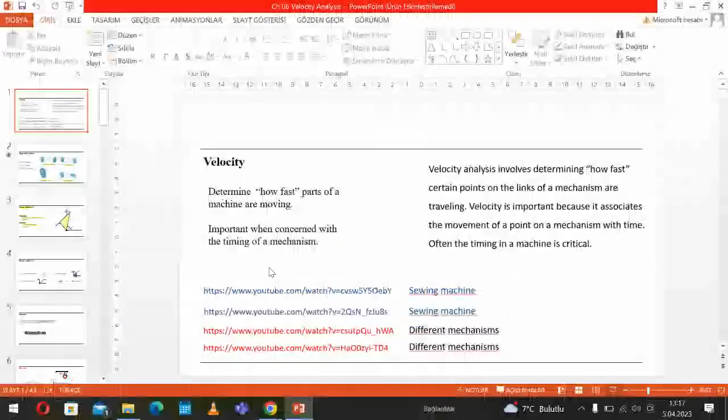So I send the email to you. Let's see that. I need the homework in a certain content, and therefore let's see that. So then I will share with you now. Okay. Not that. Okay, here.

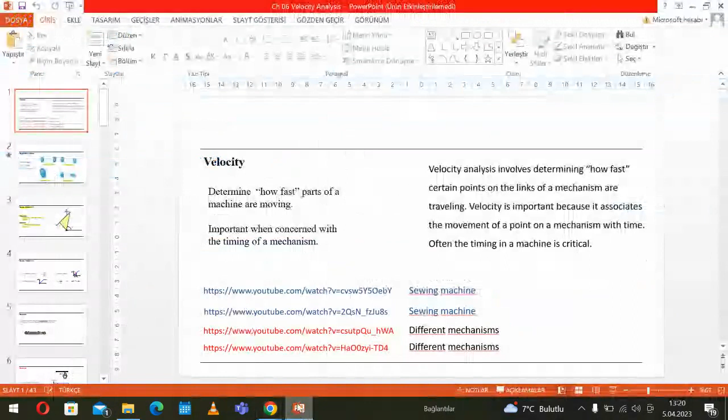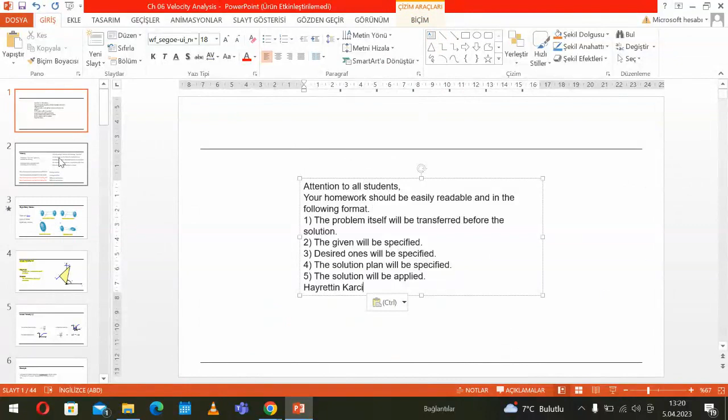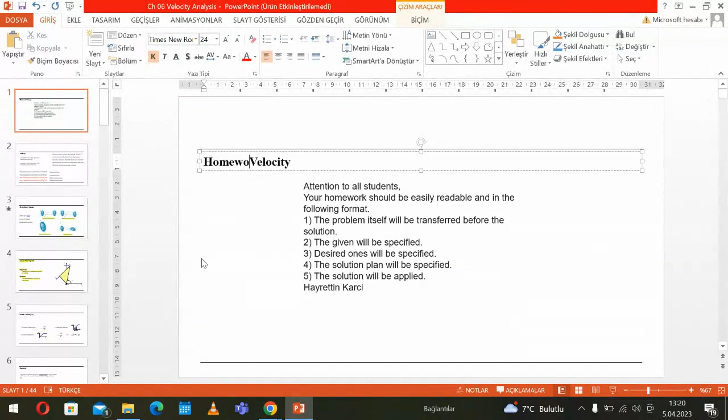So this is the content, okay. So you see the content of the homework, or the rules for the homework. I sent this already to you via email. First of all, the problem itself will be transferred before the solution. I have to see first the question, problem as problem, then what is given, and what is desired or to find, and the steps of solution, plan for the solution, and the solution step by step. It must be followable and understandable. So not write just a piece of paper, something, and send as homework. It must be, let's say, a good format. I expect a good format.

Okay teacher, thank you. Okay. Deadline will be 10th, or the 10th. Okay, no problem. 10th April.

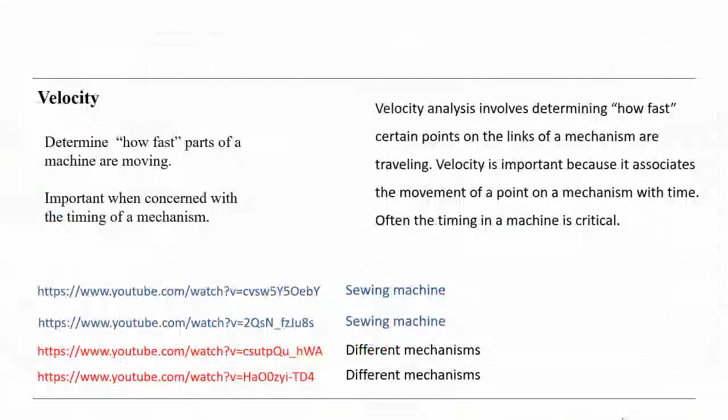So we said the velocity... I just have a note for the homework. Yes, this is the note for the homework.

The homework itself gonna be handwritten? Yes, it can be handwritten, but it must be readable, understandable, followable. If you cannot understand, I cannot follow it. So therefore I write these steps you have to follow.

First of all, the problem. What is the problem? So you display the problem, and then what is given and what is expected, or what is to find, and then you make the plan, the solution. First I will do that, and second and third and so on, and you solve the problem. So this is the methodology to solve a problem, and I am really interested to force you to work with this methodology. It is very important for you, not for me. For me, it must be understandable, because I cannot spend lots of time to see what it is and what it means. It must still have a format. Okay, so thank you.

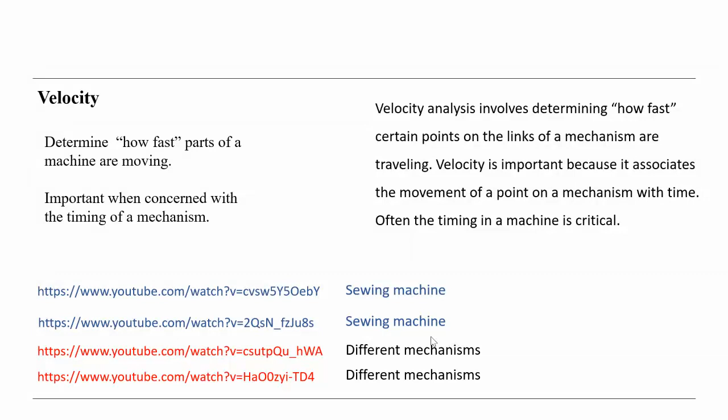So we are now studying rigid body motion. Since a link of a mechanism is a rigid body, we are dealing with rigid bodies in mechanisms. What is the motion of a rigid body? We said the motion can be divided into parts: rectilinear motion or curvilinear motion, pure rotation, or general plane motion, and so on.

Here we started with a simple example, linear velocity - that means linear motion, linear velocity. Let's use the laser pointer here. We have a joint, and it is turning around this joint. The point A has the velocity VA as a vector, and the point B has the velocity VB. We know also from dynamics that we learned already, if we have such a link or part of a mechanism turning around a point.

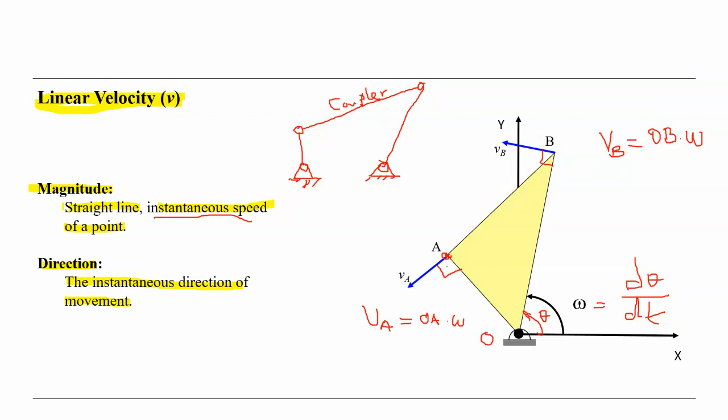But we will see later, in the case of a coupler like this here - this is the crank we said, this is the rocker, and this is the coupler. This coupler undergoes plane motion, and since it undergoes plane motion, all the kinematic parameters are instantaneous - I mean, for a certain time, for an instant.

This is straight line instantaneous speed of a point, for example, on the coupler. So the direction in this example is already known - the instantaneous direction of the motion is like this. The linear motion direction must be perpendicular to OB for point B, and for point A, the direction of the linear speed must be perpendicular to the line OA.

Okay, so then linear velocity, how can we define the linear velocity? We can define it as V equals dr over dt. What is dr? That's the displacement. And dt is the time passed for this displacement.

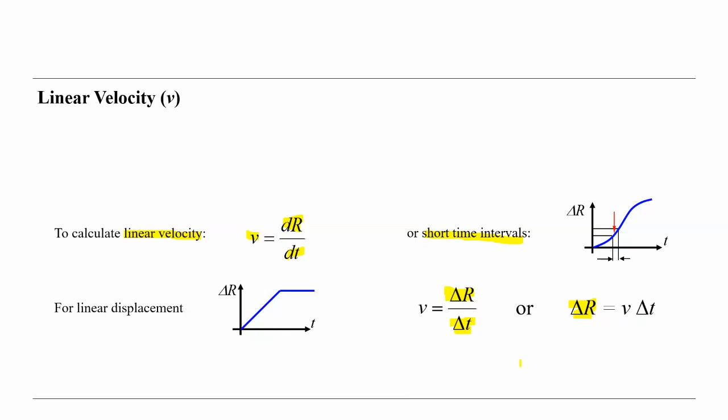This is how we calculate linear speed, linear velocity. We already learned this in dynamics. So here also we can write, in a short interval, v equals differential displacement over dt, or dr equals v dt, and so on. You remember these equations from kinematics. And we said, there's an example here.

So a hydraulic cylinder extends at a constant rate, meaning the linear speed is constant. Since it is a linear actuator, it provides the linear motion, and its full stroke is given as 256 millimeters, and the time for that is 4 seconds. Determine the velocity of the rod end, as we already did in our last lessons.

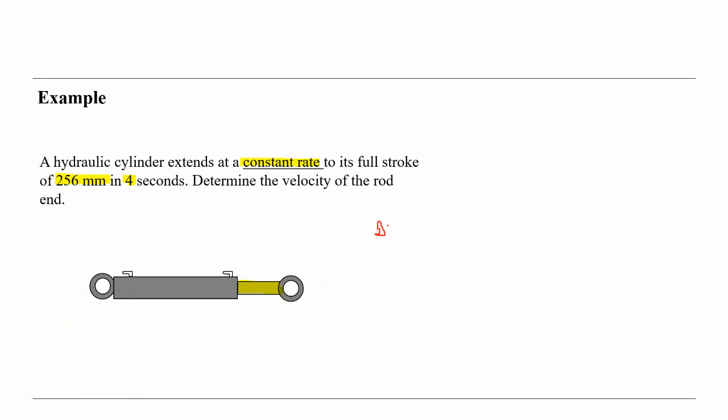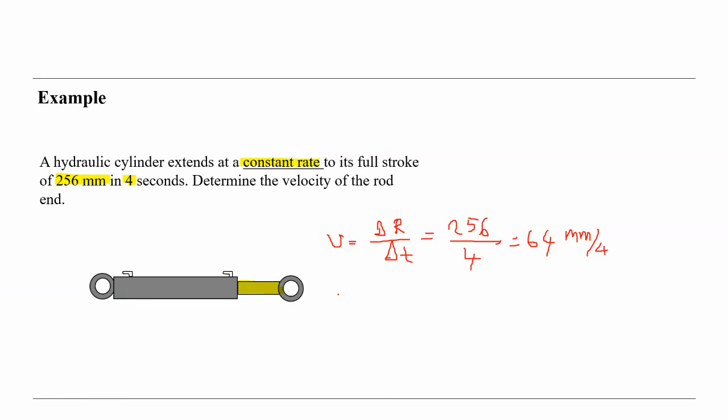So this is dr or ds over dt. This is the velocity, magnitude-wise, and this equals 256 over 4, which gives 64 millimeters per second. Is it correct? Okay, it's correct. So, let's continue.

Also here's an example. The velocity profile is shown here. You see it starts from 0, this is the origin, and goes in that direction. This is the velocity-time graph, and it continues like this, then stops. That means we accelerate, starting here, and continue with a constant speed. This is the constant speed area.

Let's choose that here. So this is the part from 0 to 0.5 second. So we accelerate, we apply the acceleration, meaning we increase the speed from 0 to 9, and we continue with the speed 9.

And then we continue, let's say 3.5 seconds, and after 4 seconds in total, we reduce the speed and bring, let's say, the gripper here, we stop the motion. So the velocity profile is shown for a programmed robot here, this is the robot, and here the gripper, and we need to determine the total displacement of the gripper.

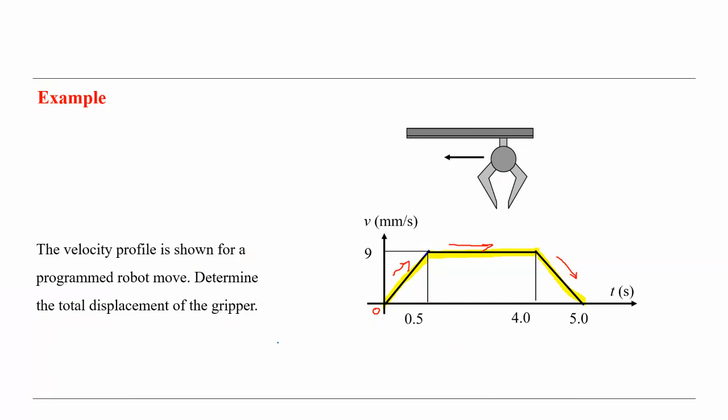So how can we determine the displacement of the gripper? What is displacement? We already know that to define the speed, we said speed equals dr, let's say the displacement s, over dt. So this is the displacement.

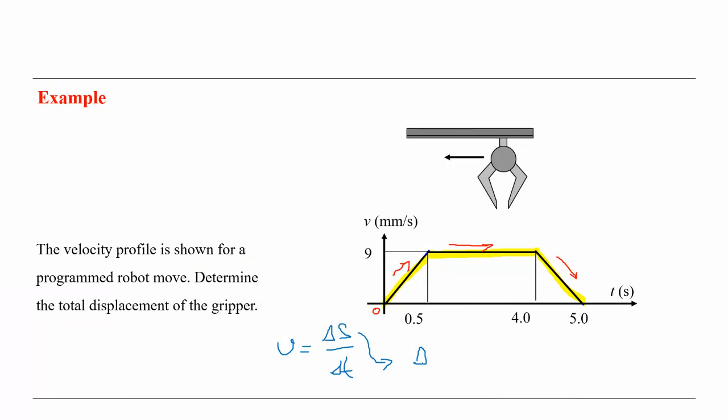So what is ds? If we write it, ds equals v times dt. So v times dt is actually, if we consider here, the area, v times dt. We will take the integration, right? Yes, integration, but in this case we have a defined geometric figure, and we don't need integration. We can calculate the area of these geometric figures.

Let's say this is S1, and this is S2, and this is S3. So the area of S1 equals 0.5 times 9 over 2. This is the area of this triangle. And S2 equals, here 9 times, this is the time 4 minus 0.5, so 3.5.

This is the time, and the speed is constant, so times 9. S3 again is a triangle here, this is the area here. And here, this area here is S3, and so on.

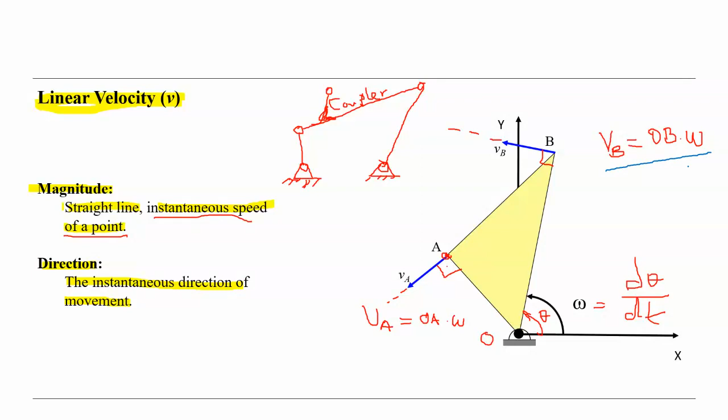Also, the relation we already taught between angular speed and linear speed we discussed, and we can write here VB, the linear speed of point B, is equal to omega 2 times the distance OB, length times omega 2, and this must be perpendicular to OB.

This is very important, and this is also perpendicular to OA, because it's the linear speed of point A. Here again, VA is equal to the distance from O to A, OA, times omega 2. Omega 2 is the angular velocity.

Okay, so we learn what is the relation between angular velocity and the linear velocity of a certain point which is turning about a point, and we know also the angular velocity.

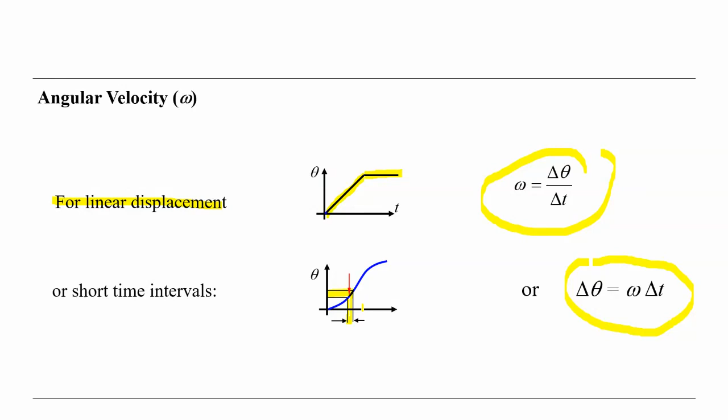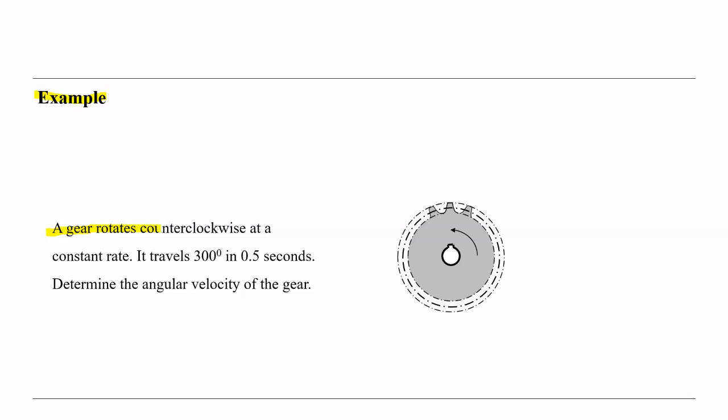So let's have an example regarding that. Here's our example: there's a gear, and the gear rotates counterclockwise, in that direction, at a constant rate. Constant rate means per time per angle is constant, so we can write it in that way.

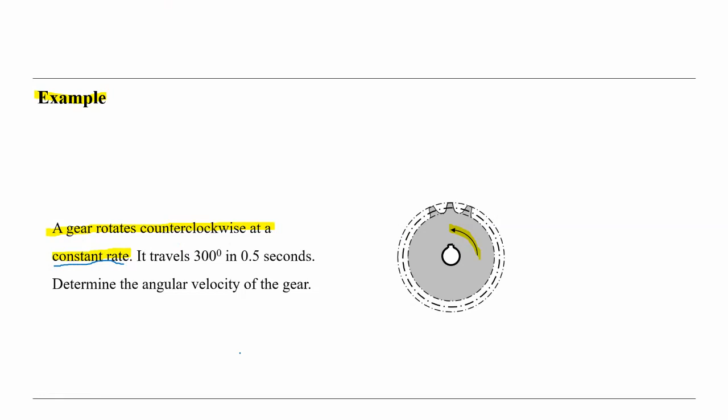So the counterclockwise constant rate means omega is constant. That means for a certain change of theta, we always have the same time delta t. So maybe in 1 second, 1 degree, or in 1 second, 1 radian, and so on. So this is constant, okay.

So it travels 300 degrees angle in 0.5 seconds. Determine the angular velocity of the gear. The gear travels 300 degrees in 0.5 seconds, so we have to calculate the angular velocity.

We know the angle, so let's say given is the angle, theta in total is equal to 300 degrees, and the time for that is t is equal to 0.5 seconds. That means we know the gear in total is turning about the point O here.

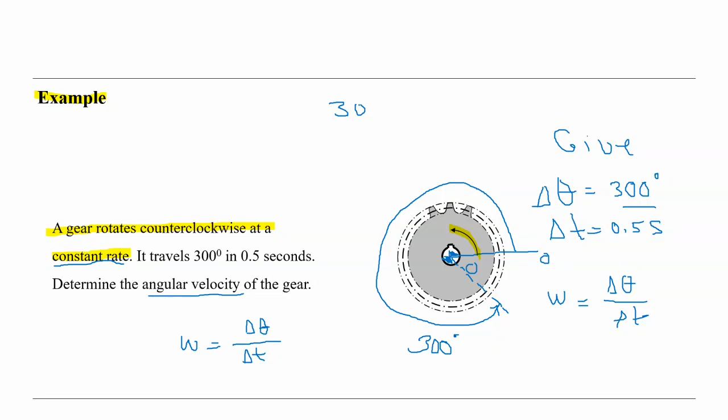So we know that 300 must be divided by 180 and times pi, because 180 degrees is 1 pi, and 360 is 2 pi. So then here we can calculate them.

The angle passed in radians. So we can say this is 0, here we have 3, and here so let's say 5 over 3 pi. Okay, so this is the angle passed, and this is time. So then we can say, okay, here's the angular speed.

Let's use the red one, it's better. So the angular speed is equal to 5/3 pi over 0.5 second. And this is radian per second, or 1/second. So this is the angular speed.

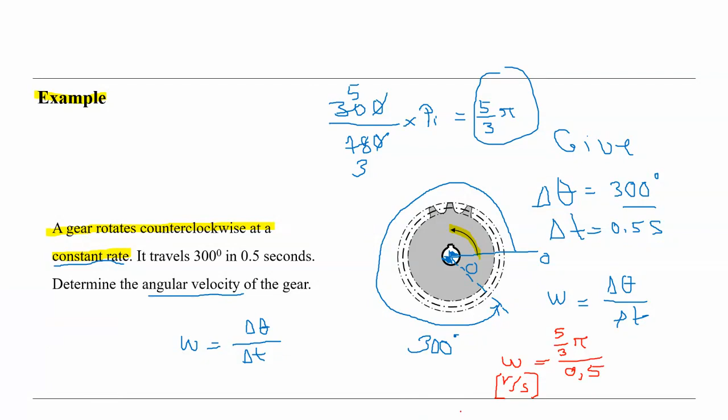The directions of V and omega are always consistent, meaning the direction. The omega can be clockwise or counterclockwise, and based on that, if the omega is counterclockwise, the linear speed is also counterclockwise, in the left hand. So then to calculate the magnitude, we need the length of the position vector times the omega. According to these equations, V is equal to the magnitude of the position vector times the omega, or in vector form.

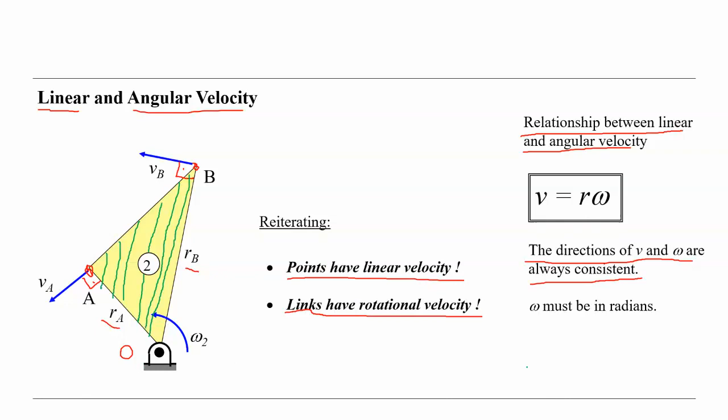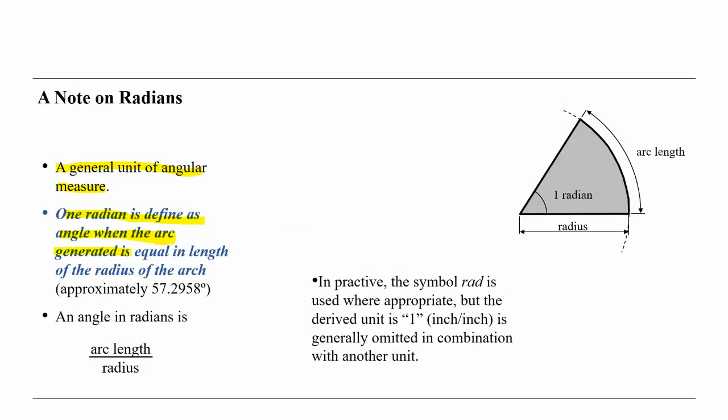So here's information about a note on radians, what radians are, and so on. The general unit of angular measure is the radian. A radian is defined as the angle when the arc generated is equal in length to the radius of the arc, approximately. An angle in radians is arc over radius.

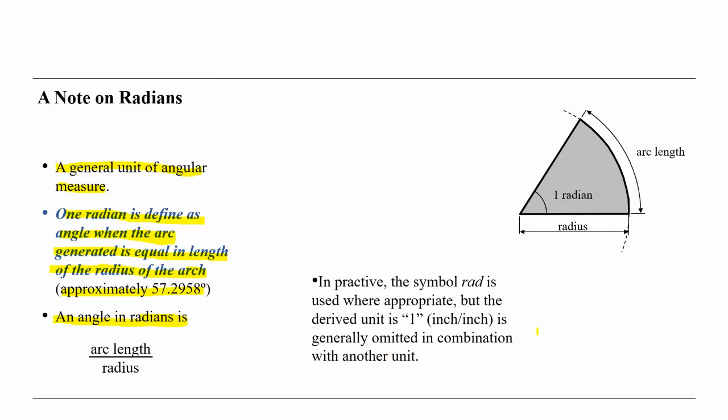So in practice, the symbol rad is used where appropriate, but the derived unit is 1. So inch, or millimeter, we generally omit units in combination with other units. So this is the picture here for that.

So the example. What is the problem here? What do we need to find? If the speed of point B is 50 millimeter per second, determine the velocity of point A if the link is moving clockwise.

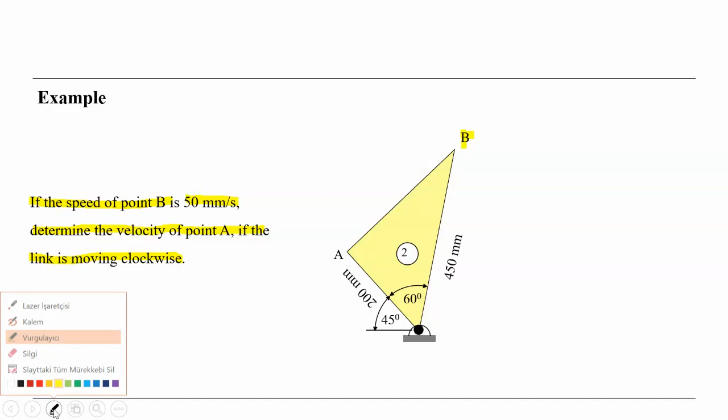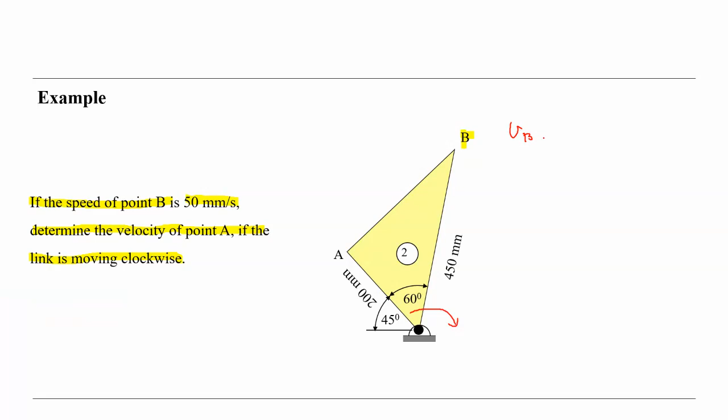So clockwise means it moves, let's use the pencil and the red one so you can see. So it moves clockwise, clockwise means in that direction, okay. So B is given already, VB is equal to 50 millimeter per second.

Velocity of point A, this is what we have to find out. So we know the directions. Since the rigid body is turning clockwise, VB is like this, we know the direction, perpendicular to OB. And the magnitude is also given. Let's assume we use the scale, and we can say this is 50 millimeter per second. So now we have to find the velocity of A, and we know the direction of A, which must be perpendicular. Maybe it's not exactly perpendicular, this is 60 degrees, and maybe it's like this.

So this is A, and we know this is VA, the velocity of A. We know the direction, but we don't know the magnitude of the speed. How can we calculate the magnitude? We know that this distance is also given. So VB is equal to OB times omega, the angular velocity of this rigid body. OB is known, VB is also known, but omega is not known. So omega is equal to, we can calculate omega.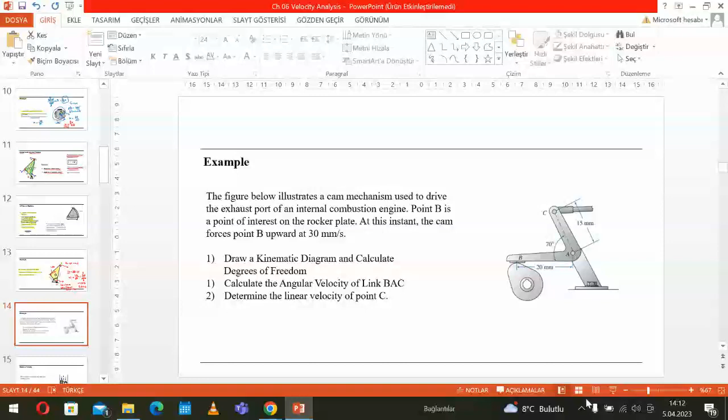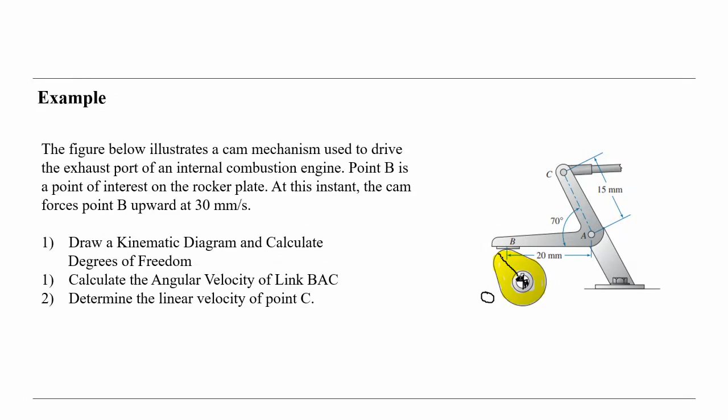The figure below illustrates a CAM mechanism. This is the CAM here. We shortly discussed it at the beginning of our lessons, but we will continue, and I hope we will have time to talk about this CAM mechanism. It is turning around point O here with a certain eccentricity, and this is the point where it is turning about. Let's say this is the O turning point. You see the diameter is changing: this is the longest diameter here, since it is turning, and this is the shortest diameter here.

So let's say this is R1, and this is R2, and the difference delta R equals R1 minus R2 is the stroke. That means this part, BAC, the link, is moving up and down because of this eccentricity. So this is the mechanism. How does it work? The point B is, BAC is also fixed here, so that means it's turning about the point A, sorry.

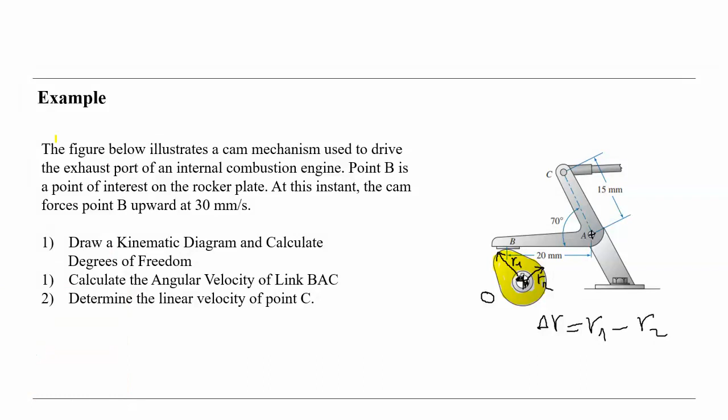So what is given now? Let's see. The figure below illustrates the CAM mechanism used to drive the exhaust port. This is the exhaust port here of an internal combustion engine.

Point B is a point of interest on the rocker plate. We are interested in point B, let's use another color for that. So point B is the point of interest on the rocker plate at this instant. So at this instant, this is also important. So the CAM forces point B upwards at 30 millimeter per second.

So B is going, let's use the red one, in this direction. This is the speed of B in that direction, and it is perpendicular to the line BA. So the CAM forces point B upwards, in that direction, and it must be perpendicular to that line. This is also known.

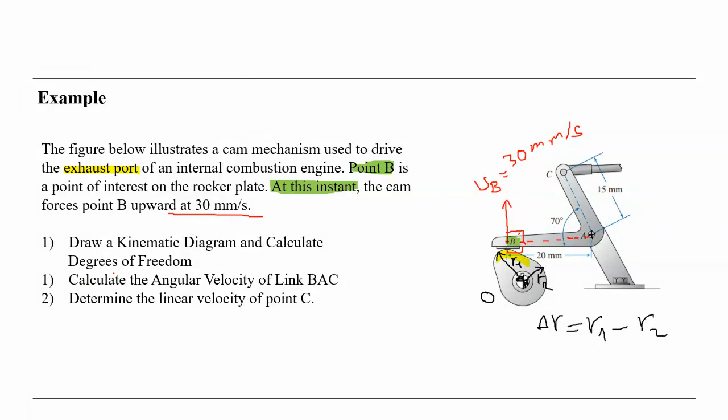So draw a kinematic diagram and calculate degree of freedom. First we have to draw a kinematic diagram. So what is the kinematic diagram? This is our kinematic diagram we have here, turning around, and here we have A, and then connected, same rigid body. Here we have a connection but we don't know what's happened, so there is a break here. This is our point B, this is A, and this is O here, because it's also a turning point. The cam is turning around this point, and here is also a turning point.

So these links, BAC, is also turning about this point A. Okay, this is the kinematic diagram. Calculate the degree of freedom. Let's calculate the degree of freedom. So here, this is link 1, this is 2, and this is 3.

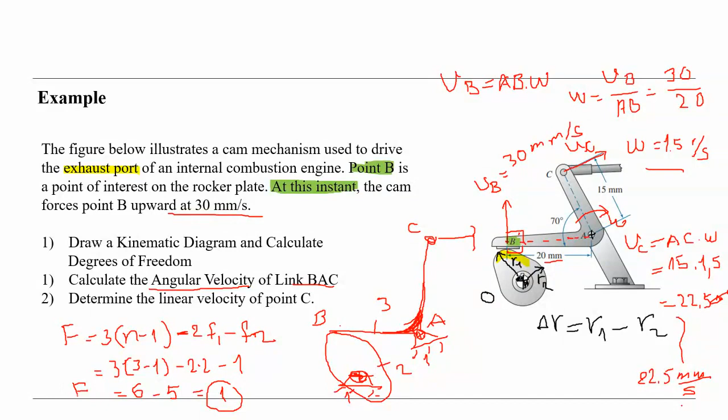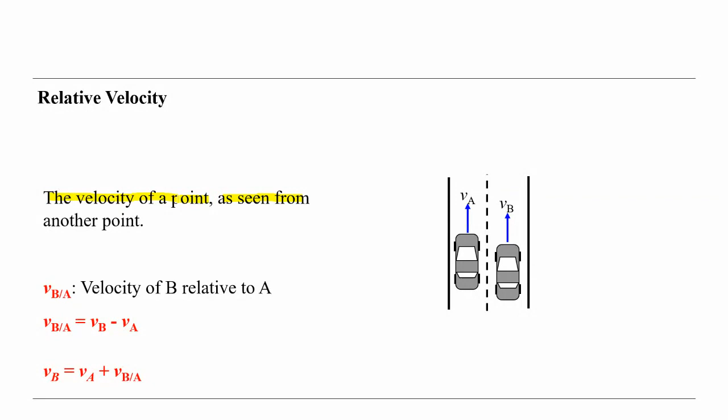Let's come to the relative velocity. So till now we don't touch the relative velocity, we touched linear velocity and angular velocity. Now we come to the point of relative velocity, that means one relative to the others. So relative velocity means the velocity of a point as seen from another point.

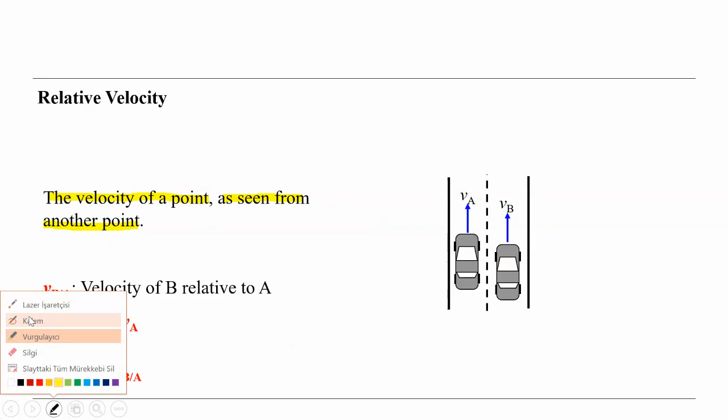Let's assume somebody is sitting in this car, and let's do it in that way: somebody is here, and another one is sitting here. This guy is observing this one, checking the speed relative to this car. So this is not absolute speed or absolute velocity, this is relative velocity, meaning the speed of this car relative to the other car. Let's say this is car A, and this is car B. Speed of car A relative to B, or vice versa.

So how can we write it? We can write it as velocity of B relative to A. This is the way we can show it: velocity B relative to A, BA, or we can add a slash in between. But mostly we can use VBA, that means B relative to A.

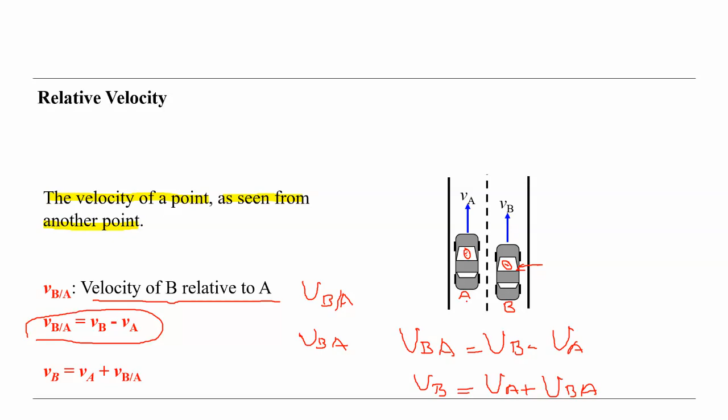Okay, let's continue with relative velocity.

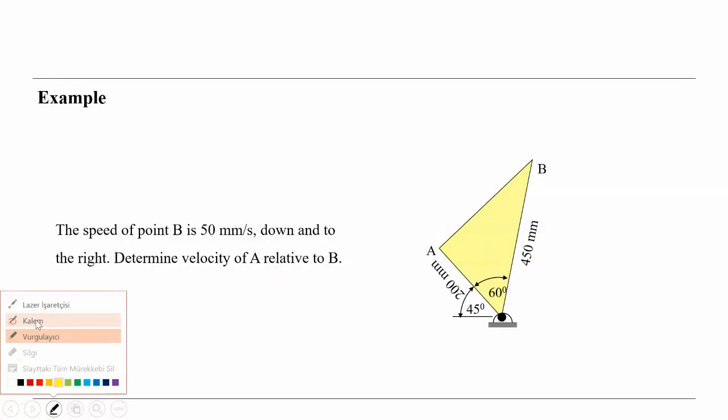So how can we do that, relative about the point A? Let's use it. This is the speed, and B is given. The speed of point B is 50 millimeter per second down to the right, that means perpendicular to OB, like this, perpendicular. So okay, this is VB.

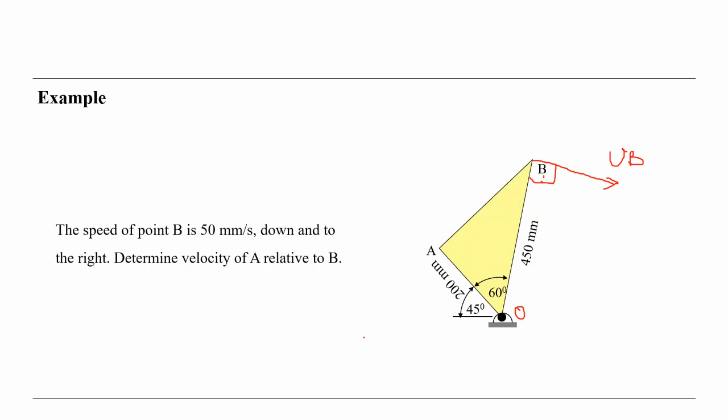Okay, now the question is, of course the speed of A is also in that direction. We know that, we know the direction. It is also perpendicular to OA. So there are different methods to calculate the speed at this instant.

One of them is the graphical method, and the other one is the analytical method, and we will talk about both. But first we think about the analytical method. Of course we can also use the graphical method, and then we can calculate using the analytical method.

So this is VA. Okay, so then the question is determine the velocity of A relative to B, that means V A relative to B, so VA is equal to, or determine the velocity of A relative to B.

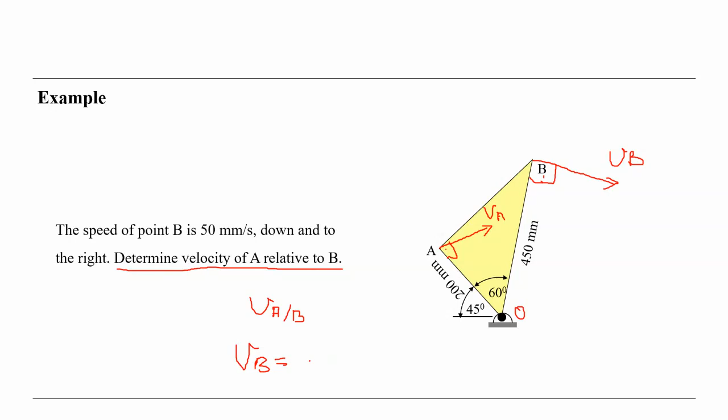AB. Okay, then we have to write the equations. VB is equal VA plus - how was it? No, this is where I will change, relative to A relative to B means, okay, let's change that. So we have to write it in that way: VA is equal to VB plus VAB.

A relative to B. So this is the question we have to calculate. We don't know that, we don't know that. But what we know actually is very interesting.

Now you have to follow exactly what we know. We know the magnitude of the speed B, velocity B, magnitude and also direction. Let's draw like parallel to that.

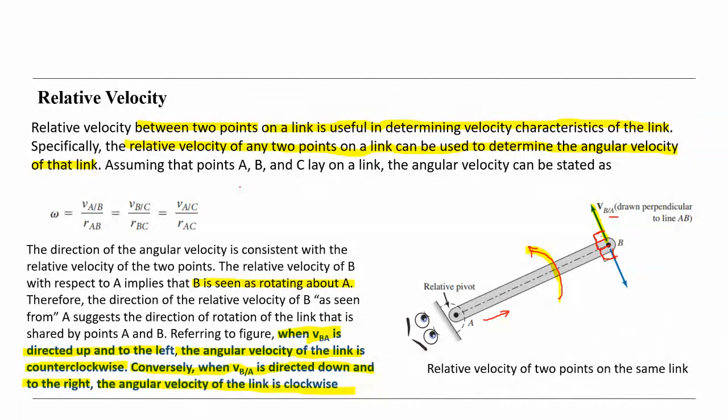Here we set VAB, RAB, and VBC, RBC, and VAC, A relative to C, or A relative to B, and so on. Okay.

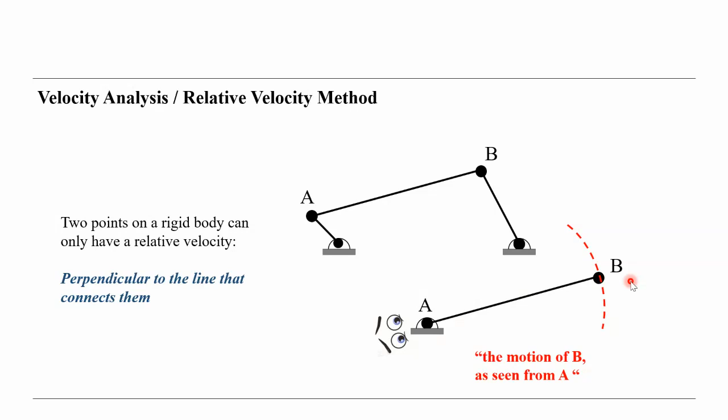So this is a very important definition or explanation we'll use.

So that means, if we analyze the velocity for a crank rocker mechanism, or for any mechanism, we have to consider which type of motion each point undergoes, and what is known regarding the magnitude or direction, or both of them.

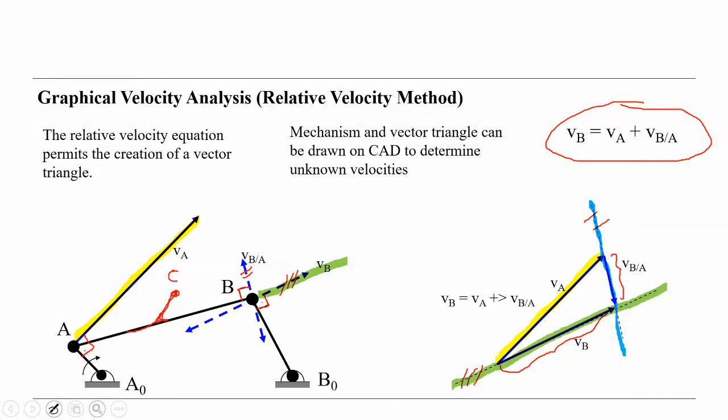So that was today. Any question?

These parts are included at the exam?

Velocity included, yes. Okay, but we learned actually, not more. We will learn more, but this is the part we learned, yes, it is included. Okay, thanks.

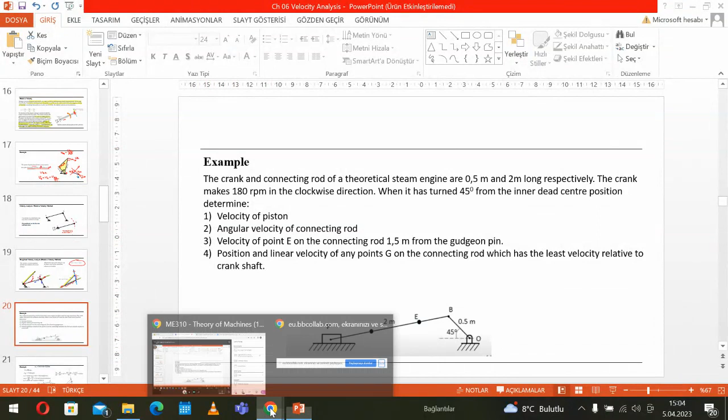So what's the question? For the theory of machines homework, how can I submit it? By email or until we come back face to face? By email. By email, yes, your paper, the answers written on a paper, you have to scan and send to me by email. Okay, after finishing the exam within 15 minutes, not late. How about the date for the homework or the exam? He's asking about the homework, not the exam. Okay, per email. I already explained, it's per email. Oh okay, thank you, so then bye-bye.